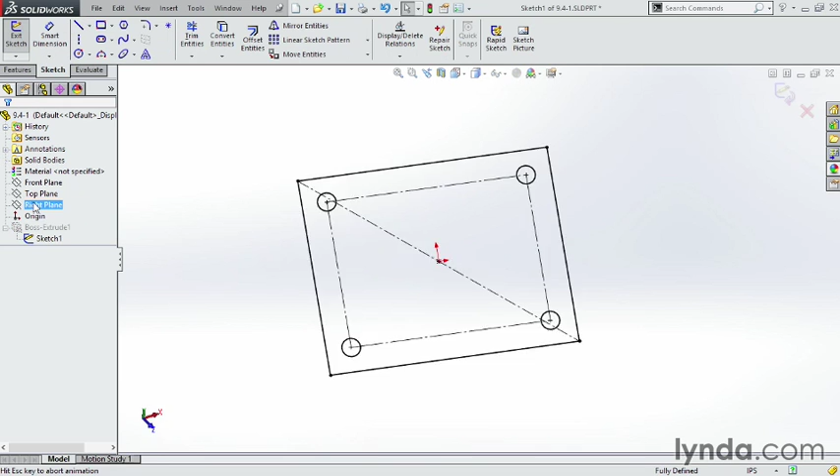Here's an example. Take a look at this part here. We've got a simple sketch 1 with a base extrude. Let's take a look at the sketch. You can see that if I click on normal to, I've got a lot of dimensions here. I've got holes in the corners, with a dimension on each one of these. There's a lot of time lost here for efficiency.

So I could delete a lot of this stuff. I could say these holes are all equal. I could delete these here and make them a center line between the two. We could refine this a lot more, but a lot of times you'll see this type of extra work being done in a part design. It's a lot of extra stuff. You're doing the same work over and over again. You're drawing 4 holes when you really only need to draw 1. You're drawing all these other lines and dimensions when you really only need a quarter of them.

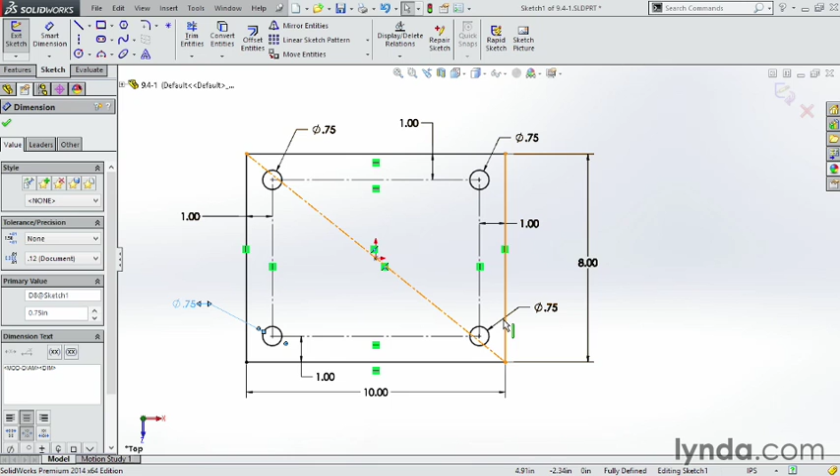Cancel out of this one. Exit out. Let's go take a look at how to do this correctly. Window, let's take a look at this other file that I have open, which is 9.4-2. You can see that's actually just 1/4 of that same part. Same boss extrude. Take a look at the sketch this time.

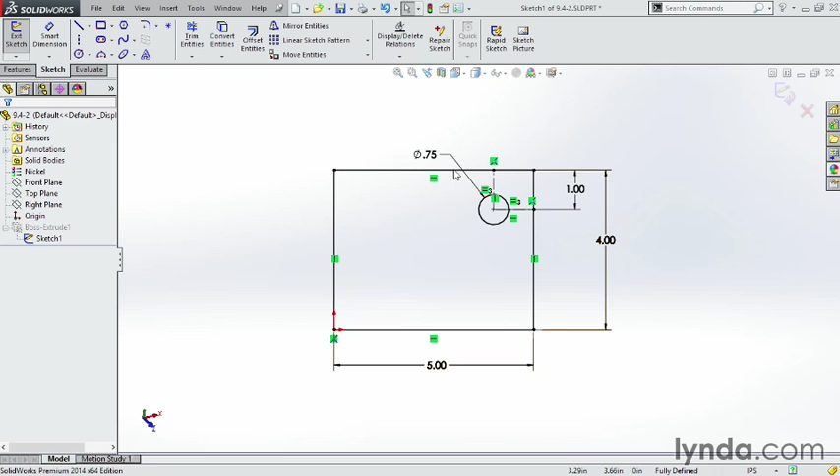You can see we have far less dimensions. I've got a dimension of 5 inches across, 4 inches tall. I'm defining the hole as 3/4 of an inch, and it's 1 inch from the corner. And I have a couple lines down here that are the same length, defining that distance from the edge. Exit out of that. You can see I did extrude of that part, and I have 1/4 of it.

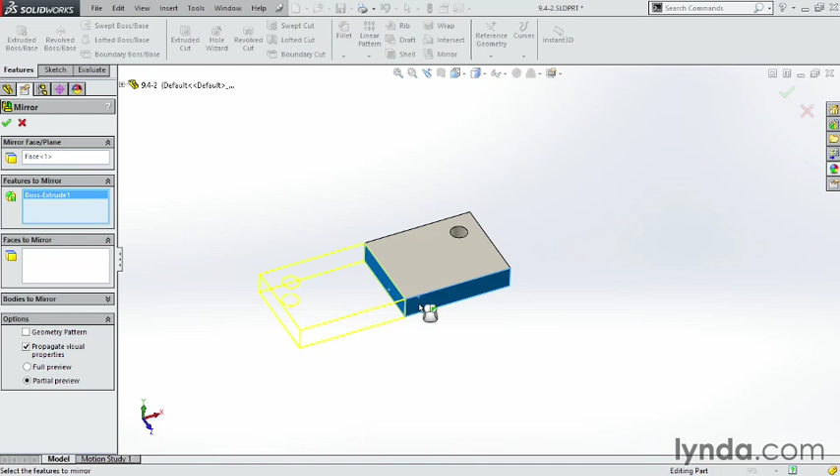Come up here to features. Come over here to mirror. Face or plane to mirror about. We're going to pick one of these edges, either this one here or that one there. Doesn't really matter. Pick that first edge. Now we can come down here to features to mirror, and that's what everybody wants to do. Skip that one though. Close it up. Hide that one. Come down here to bodies to mirror.

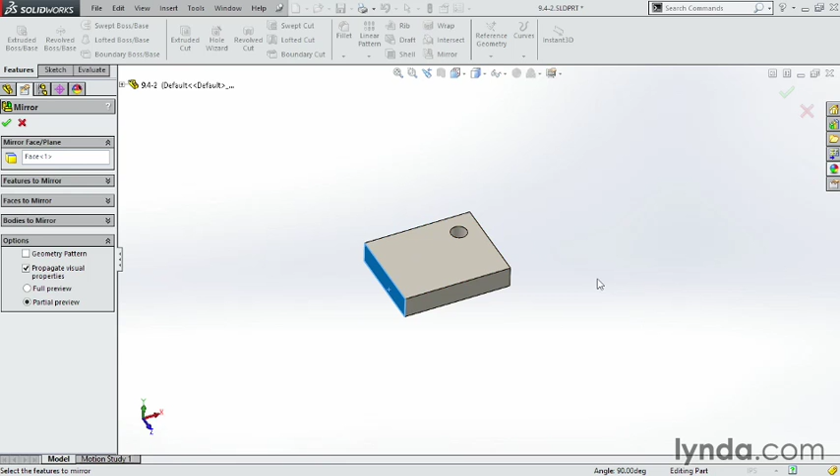This is really important. You're going to make this error, I guarantee it. Go to bodies to mirror. The software always defaults to features to mirror, but in a case like this, I don't want just one feature. I want this entire body. Come down to bodies to mirror and click on the entire body. I want to bring everything over at once. Click OK, and there it is.

That's simple. Again, come back up to mirror again. This time, face or plane to mirror about. I want to use this entire face here. So click anywhere on that face, and then come down again to bodies to mirror, not features to mirror, but bodies to mirror. Click on the body, click OK.

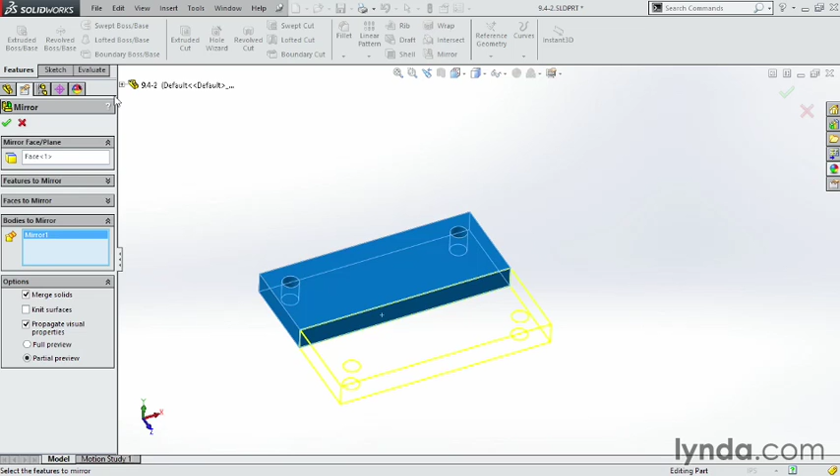And just that quickly, we've made it a very robust part that's easy to update and easy to work with. Now, any changes I make to that original feature, notice there's the boss extrude 1 plus 2 mirrors. Go back to this boss extrude 1. Anything I want to change here, for instance, if I go to sketch 1, open the sketch or edit the sketch.

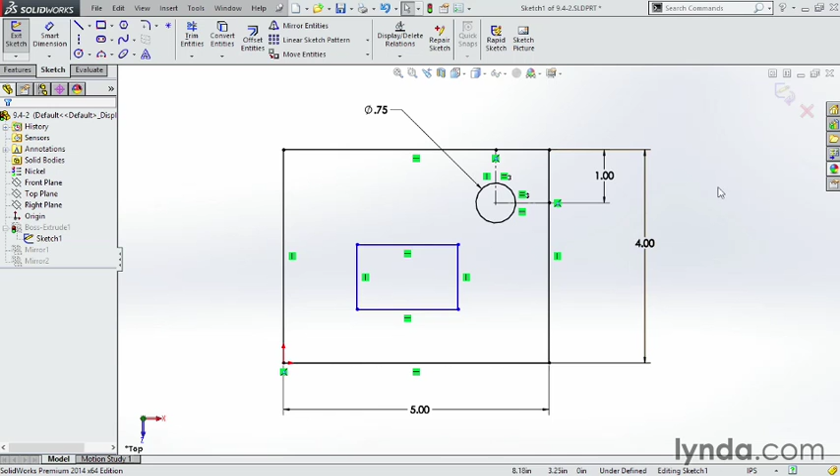For instance, let's go ahead and add just a little rectangle. Here he is. We could dimension if we wanted to, but in this case, I'm just going to provide an example. Exit out. Guess what happens? Automatically, that rectangle propagates across both of those mirrors because it's part of that original body that we mirrored.

If, for instance, we only wanted just a hole on one side and not the other one, that's when you use features to mirror. Let's take an example. Click on the top of this thing here, click on sketch, start a sketch, make a hole. I was going to drag a hole out here, and we'll do an extruded cut, and we'll extrude at 0.1. Now that is only on the right-hand side of this part.

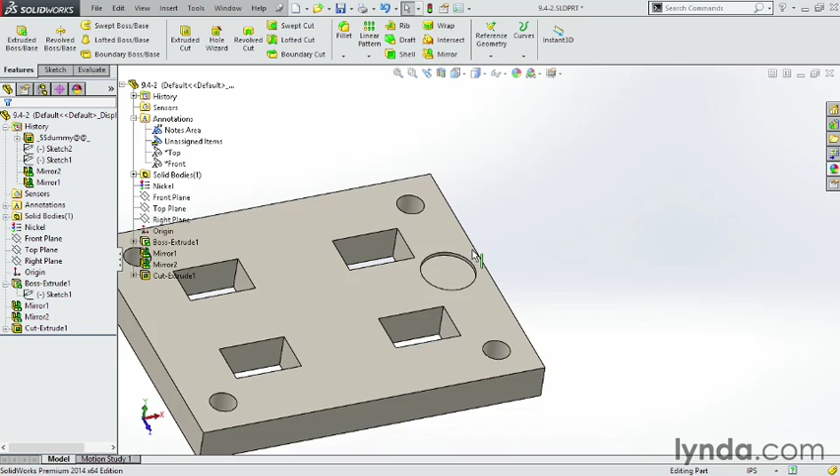I want it over here on the left-hand side of the part now. What do? Okay, first, I'm going to come up to mirror. It's going to ask me what's my face or plane to mirror about. There used to be that face here on the edge of the part because I had only 1/4 of it drawn. Now I don't. So take a look.

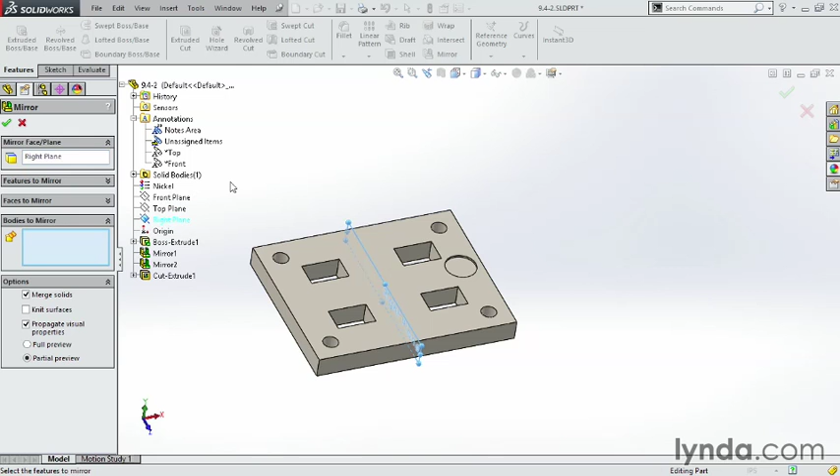Maybe you have a plane like the front plane or the top plane. In this case, it happens to be the right plane. Choose that plane. And then instead of bodies to mirror, because I don't want to bring the entire body now, I only want this one feature. So in that case, go down here to features to mirror, pick that one feature, click OK, and you can see that just drags that one feature and mirrors it over onto the other side of the part.

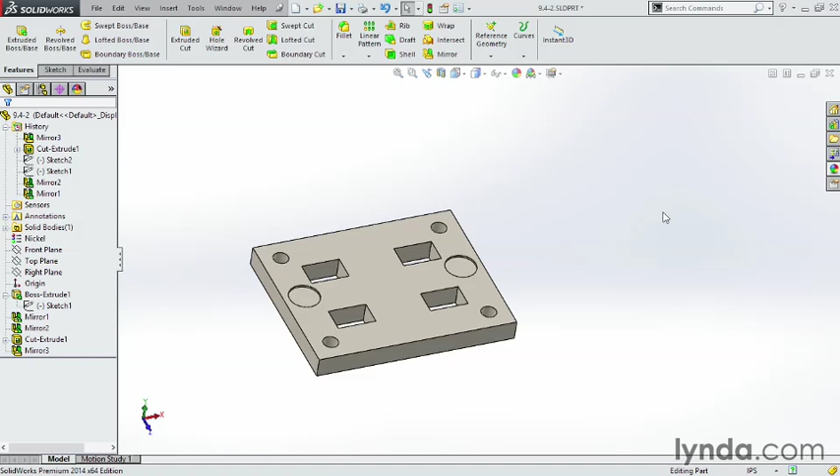So there's both body mirrors and there's feature mirrors. Both of them are extremely powerful and easy to use. Just make sure you're choosing the correct one for the task you're looking to do. Mirroring is a great time saver and makes modifying and updating parts quick and efficient.